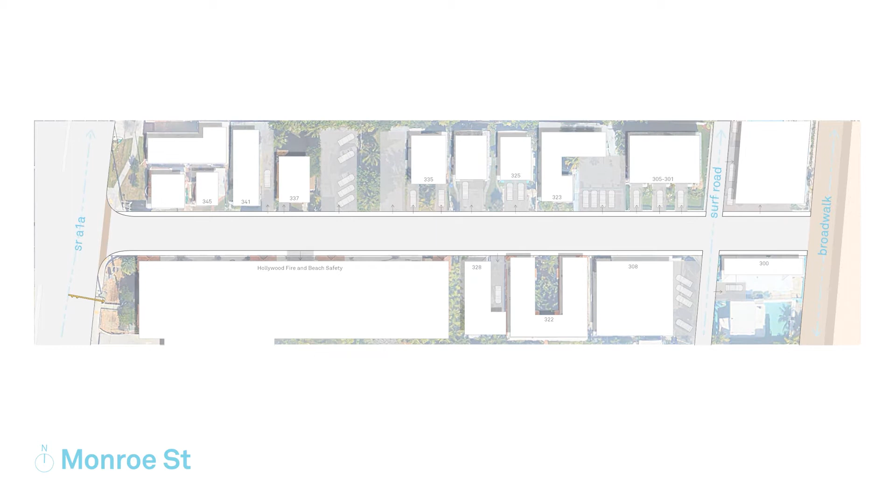These images illustrate the existing conditions both at the street and the street end. The information provided is based on conceptual designs and is subject to minor revisions during the engineering, regulatory, and construction design phase.

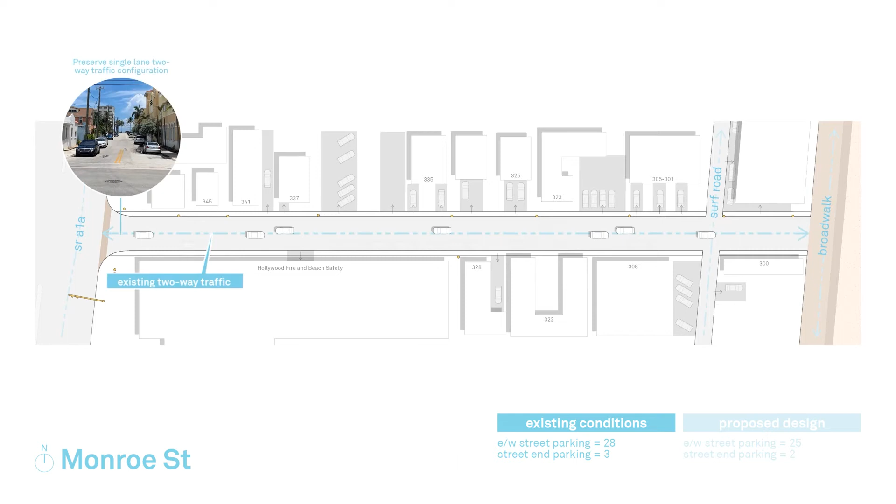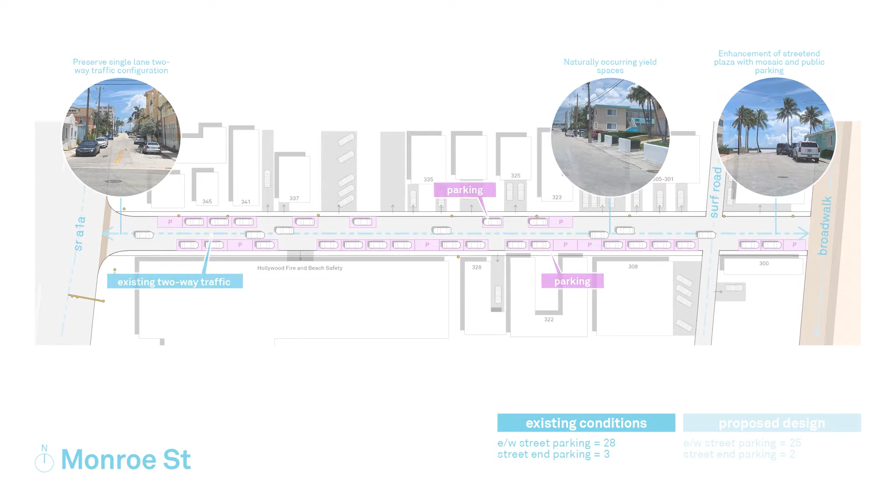Currently on the street, there are unsightly overhead utilities along with damaged patches of asphalt on the roadways and sidewalks. The existing streets are two-way traffic with parking at both sides of the street. Due to the nature of implementing the undergrounding of overhead utilities and streetscape beautification, the parking spaces, regulatory agency oversight, public lighting, and landscape improvements will be markedly different than the current conditions as seen today.

Each street is a custom design based on existing conditions. The proposed design will incorporate newly constructed sidewalks and roadways with brand new paving that will extend onto the street end. The photos shown depict images of the completed streetscape from previous phases 1 through phase 3, and are an example of the same types of lighting, hardscape, landscape, and streetscape improvements that will be implemented on this street.

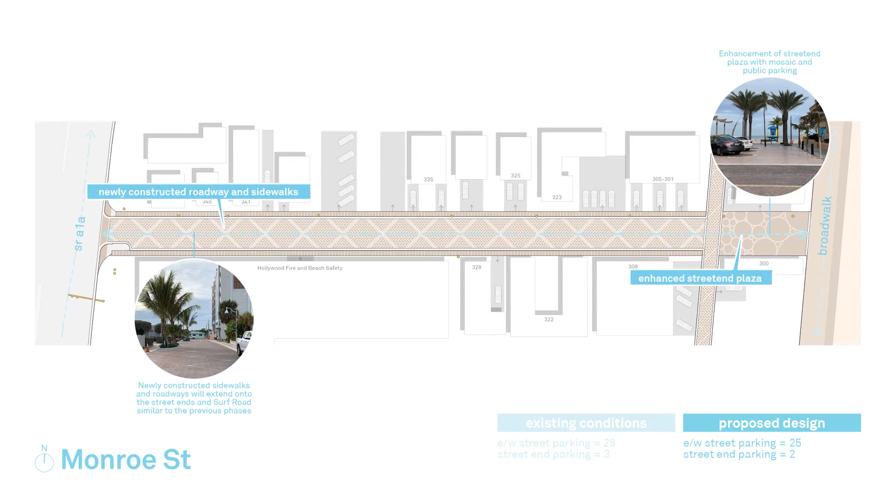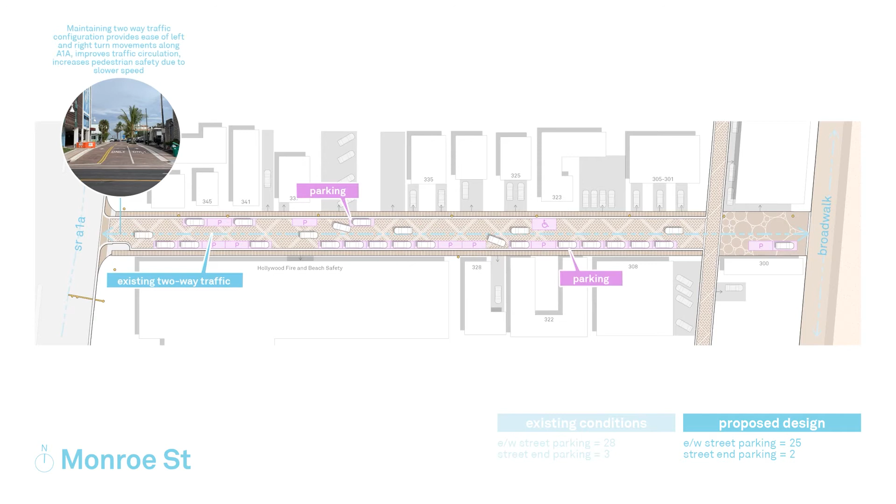As requested by the community, the current traffic pattern is being maintained, i.e., the two-way traffic with a single lane in each direction and parking on both sides of the street. Existing driveways will act as natural yield spaces, an area where a car can pull into to allow another vehicle to pass by.

Encroachments into the row have been addressed by the city passing an ordinance reducing the amount of space required on a private property for parking, i.e., if there is 16 feet 0 inches in a perpendicular configuration and/or 8 feet 6 inches for a parallel parking space, then these spaces will continue to function as parking on private property. In addition, if private property owners have wheel stops or small garden walls which can be reconfigured to allow for additional private parking, CRA staff will meet with those private property owners.

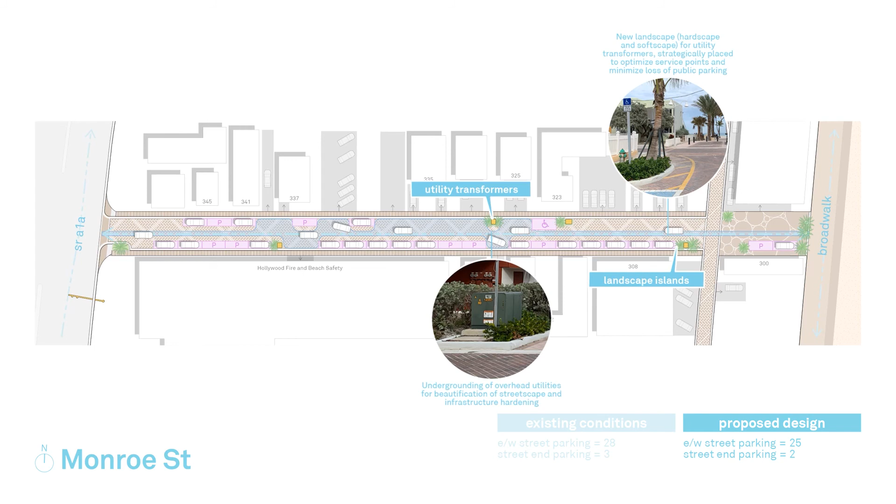The undergrounding of overhead utilities will result in utility transformers that will be placed in strategically located landscape islands to optimize service points to adjacent properties and minimize the loss of public parking spaces. Street lighting will also be upgraded to LED marine turtle-friendly lights as seen in the previously completed streetscape projects from Tyler Street to Thomas Street and Iris and Jasmine Terraces.

The design of each street maximizes retaining as many public parking spaces as possible, while dedicating the areas needed for transformers as part of the undergrounding of overhead utilities.

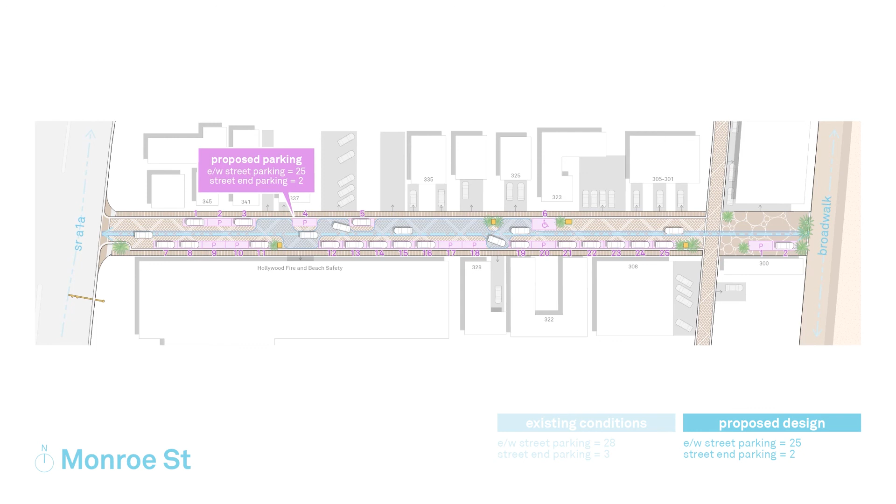For Monroe Street specifically, Broward County regulations and FPL equipment needs result in a net loss of 4 public parking spaces, i.e., 3 parking spaces on the east-west street and 1 parking space at the street end.